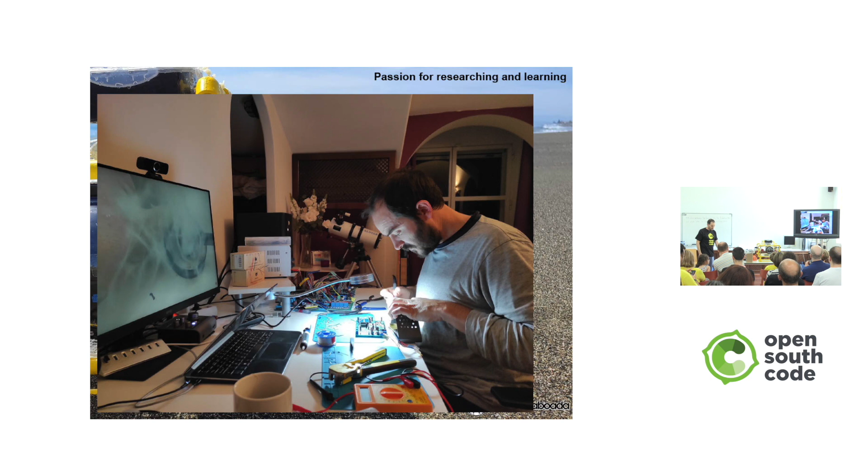Also, you have to have passion for sharing. In 2003, I was part of Malaga Wireless. We've been here in La Térmica, at Sala Benalmádena, since the year 2003. You have to have that—you have to share. You're in a community, you're getting something, and you must give something back.

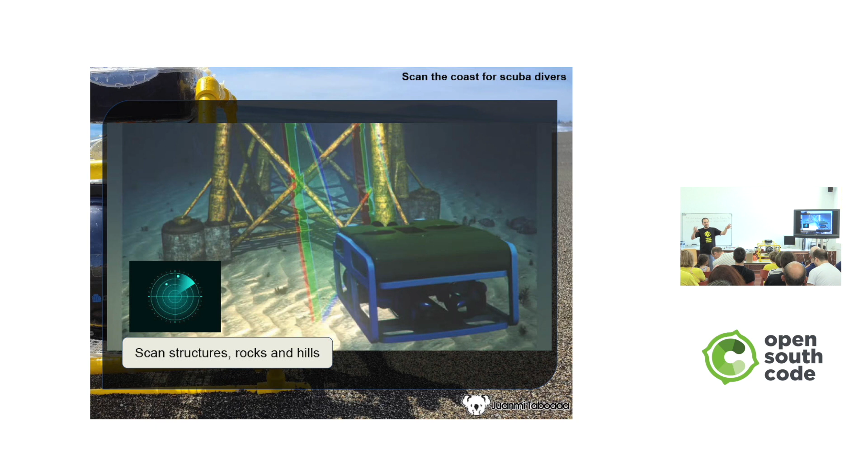So what is the basic plan? I want to make a 3D map of the place I want to go. What you can do is scan structures, save them in a database for later analysis, and slowly build a 3D map. You can also do it with sonars, which actually need a lot of energy.

For this kind of submarine, I decided to make it in a way that is low energy, that uses very little power. So it's built entirely with microcontrollers. There's no Linux, it's just a compiled microcontroller, an ESP32 and a Raspberry Pi Pico, which is a microcontroller, not a computer like we're used to, without an operating system.

One approach I decided to use was fish finders. Fish finders work really nice, they're cheap, but you have to modify them somehow to grab the information. The information they get from the ground and from the fish, you have to tweak it, change it, make it work for this purpose. So it was a difficult approach.

Then I found Meshroom. Meshroom is an open source software for photograph analysis, and it does exactly photogrammetry. Photogrammetry is when you take many photos of one object, and you can build a 3D structure from it.

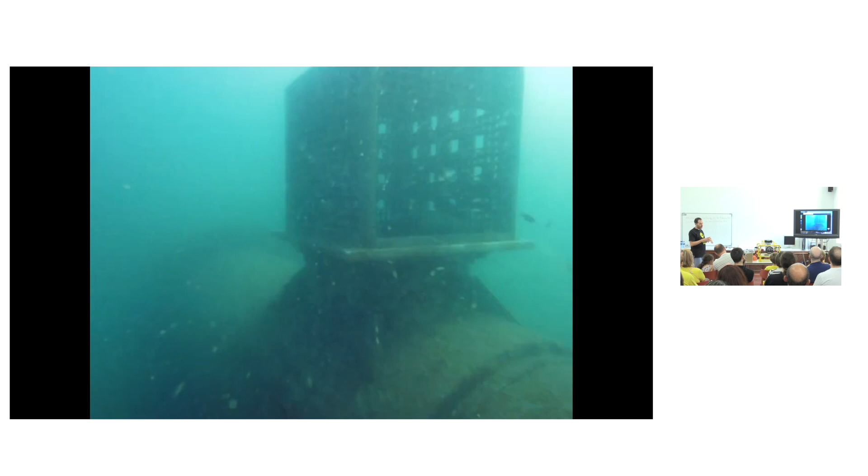So you are seeing something that is under the water. Actually, this is the entry to a different place that was requested.

In the next one, you will see the 3D reproduction of it. That's actually Blender, not Meshroom.

You can take the 3D shape in Meshroom, and you apply the textures in Blender. So that will be it.

This is another different one which I made the reconstruction of. I brought it to Blender, and I remade it a little bit, so the final client could imagine what's going on under the water, not only because of the video, but also because of the dimensions, so he could rotate it and get an idea of it.

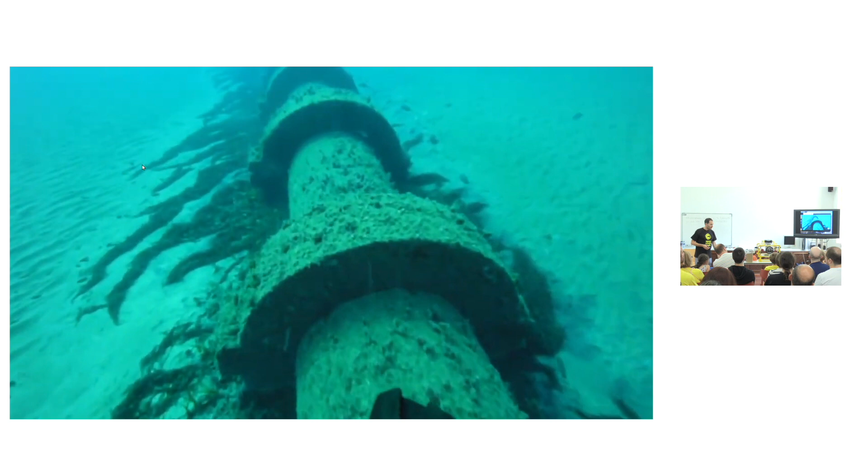And this is the 3D reconstruction of it. That's after Blender, using a mix of results from Meshroom together to fix it all together.

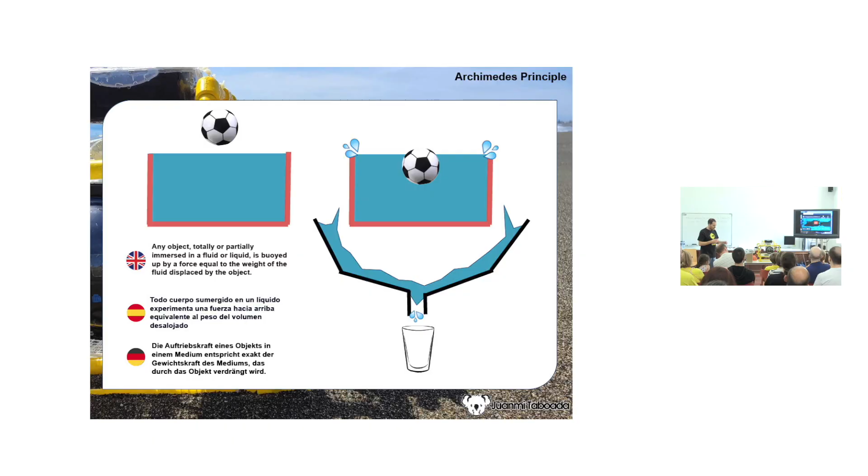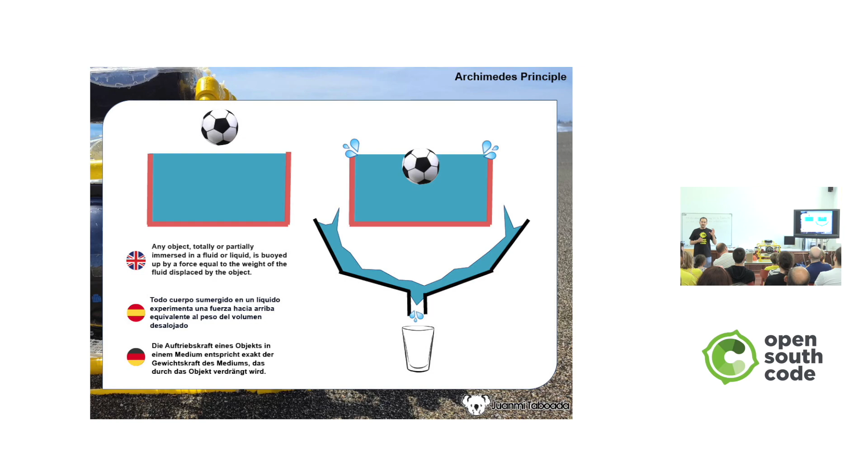Okay, a little bit of theory. Everything you do with this stuff, you have to know a little bit of how water works. So there's the first law, the law of Archimedes. We're going to talk about two laws. Archimedes' law says that any object that goes into the water displaces the volume of that object out of that place.

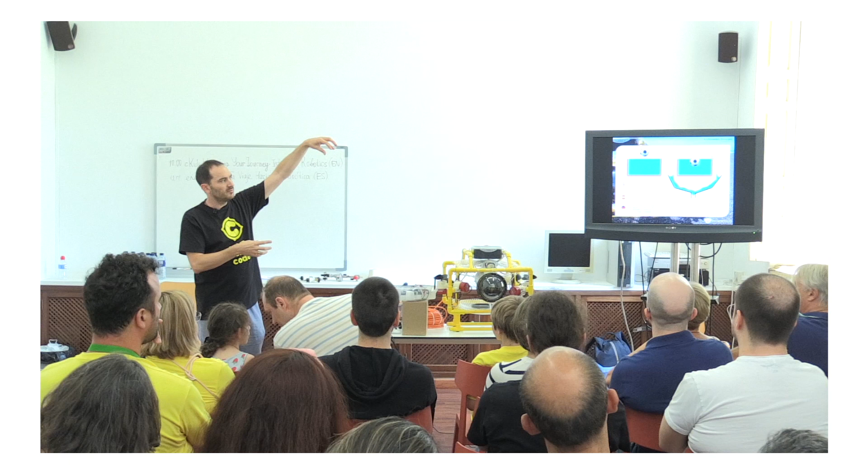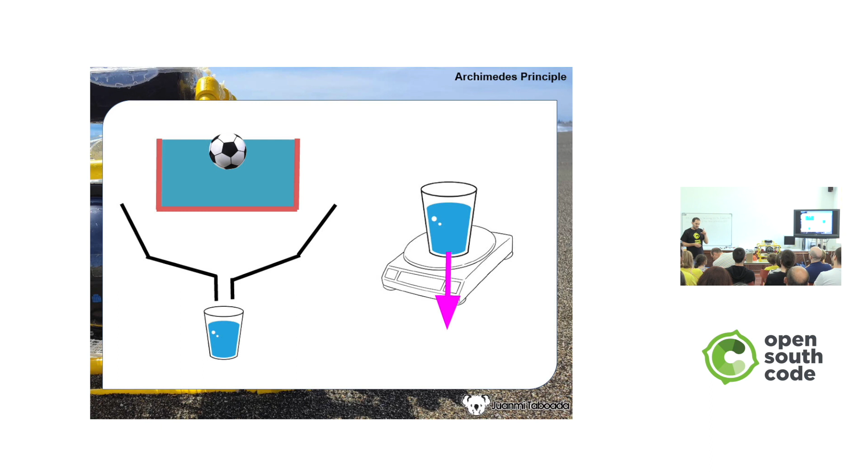So if we take all that water, when we put a football ball inside the water, it displaces some water and it goes out. Let's imagine we take it to a glass, we can measure its weight, we know how much it weighs. So the law says that the weight of that water is the force that is pushing the object out of the water.

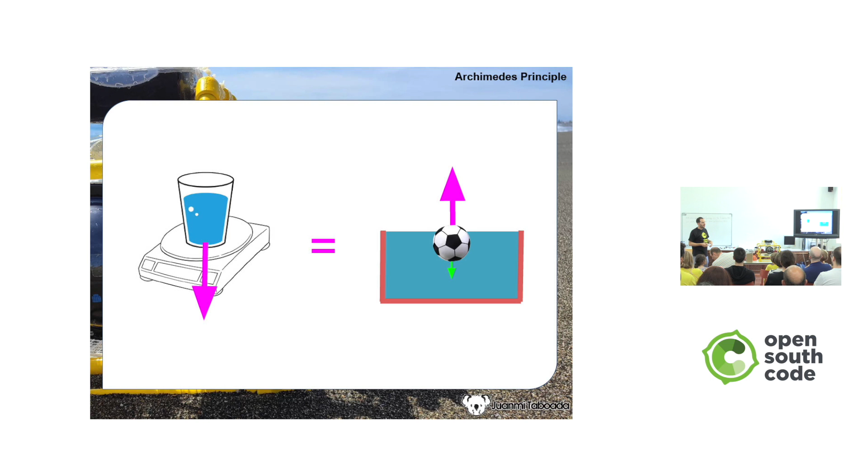So what can happen? If the ball displaces that quantity of water and it's 1 kilo, but the ball doesn't weigh 1 kilo, it will float. But if we make an iron ball, it will sink because it will be heavier than the water it's displacing, that it's pushing out.

There's another law, Boyle-Mariotte's law, which says that at constant temperature, the volume of a gas mass is inversely proportional to its pressure. What does that mean? Let's see it.

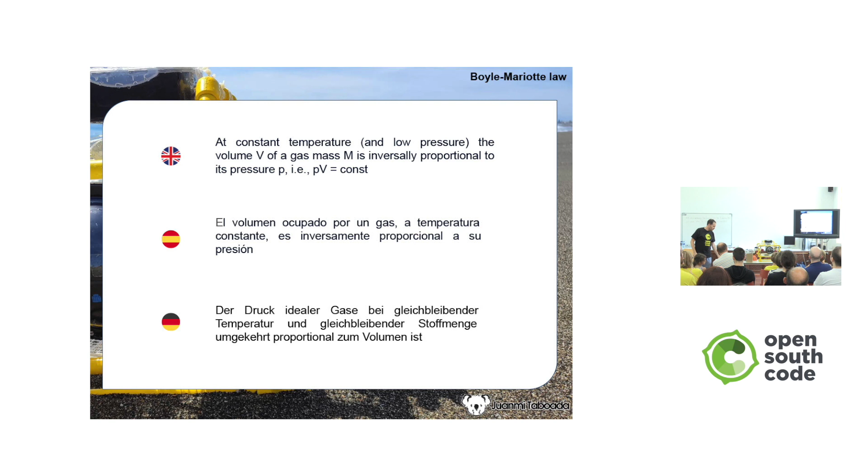Imagine we have this gas represented by 5 green points. When we compress it, we reduce the volume and increase the pressure. If we do it again, it will increase the pressure again and divide the volume again.

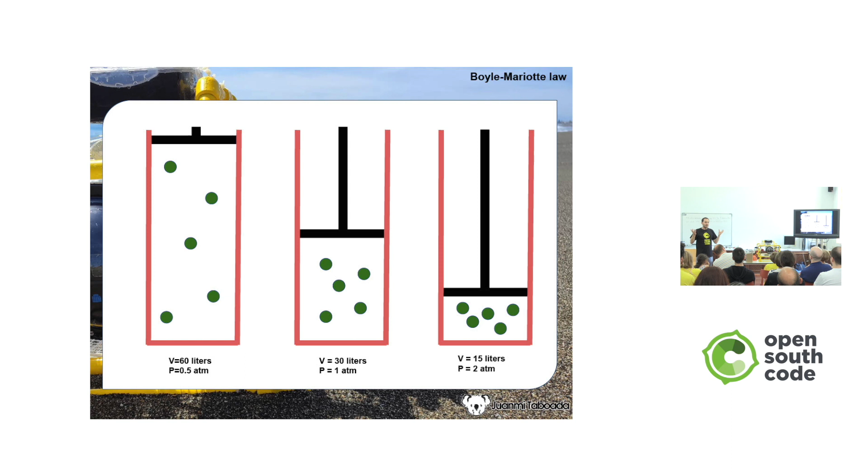So this is happening naturally under the water. At the surface you're at zero pressure, and as you go deeper, the pressure keeps increasing. So when pressure increases, what happens to the volume? It reduces. And combined with Archimedes' law, if you reduce the volume, you displace less water. So it won't be so easy to come back up, because the volume of your object has reduced.

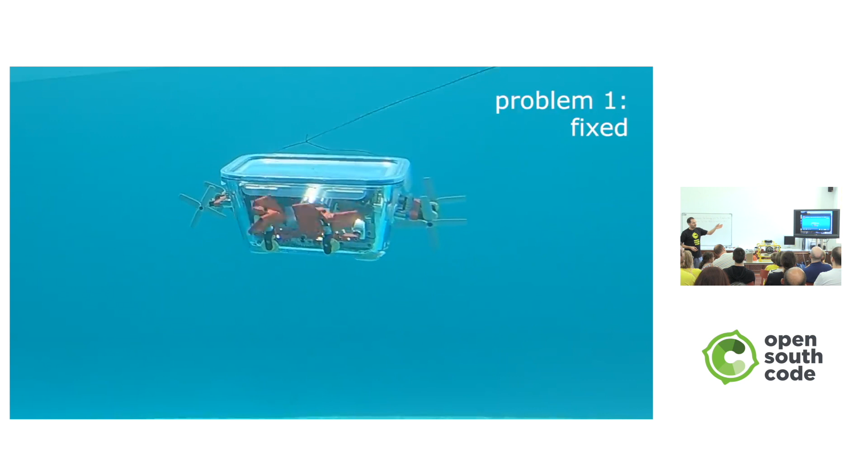So this is what happens with this kind of robot, because somebody could say, okay, I've seen the Lego one, yes it's easy to build, but after some depth it can't come back because of the weight. As you see, its shape changes, its volume changes, and it doesn't float anymore, so the engines can't take it back.

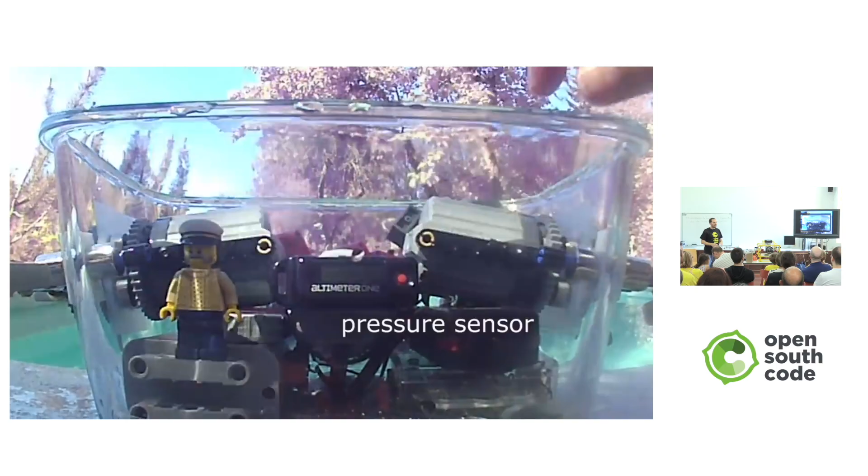This is one approach. This is another one which actually works very nicely, but when you see the videos, it's working in rivers at maybe 1-2 meters of water. This one works with a syringe, the kind used for injections. So the same thing happens: it works by taking water inside a cap, pulling it in and pushing it out.

But what happens when you're very deep? The pressure is very high, so you need a bigger engine, a bigger pump to push it out. That means more energy, that means needing more strength.

Just for you to know, with Boyle's law, in the first 10 meters when you get under the water, you reduce the volume in half. So most of the life happens in the first 20 meters. You have to count with that, you cannot forget about that at any time.

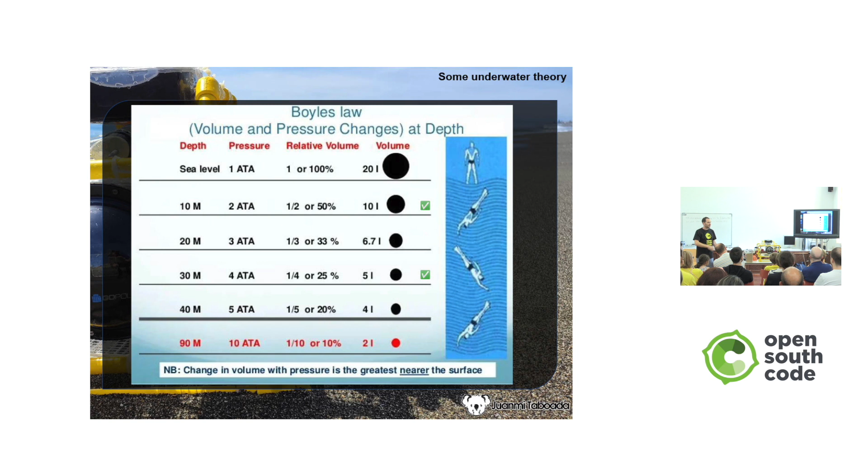Okay, we're all set with theory. What is the submarine about? My idea was that most of the ROVs I have seen work with a cable, and they are connected to the ship. So when you're operating the ROV, the information goes through a cable, and you need to be there.

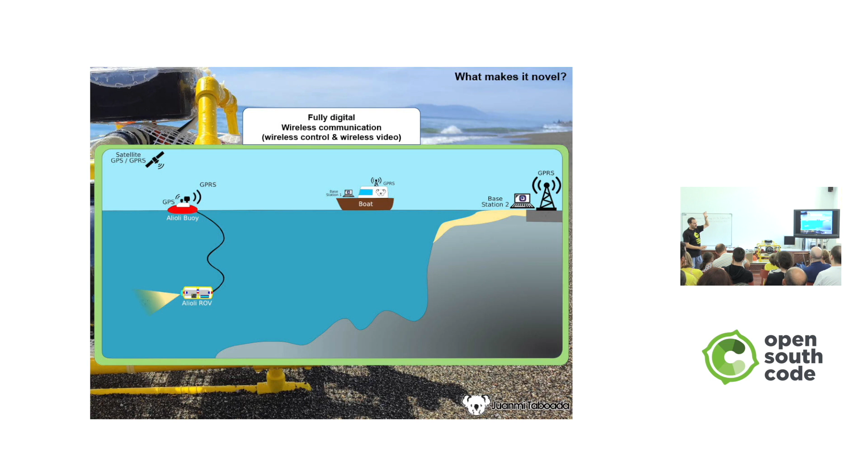My idea was a little bit different. I decided to make this one, what I call a buoy, that stays on top of the waterline. It communicates the surface with the submarine, so the submarine can operate, and the buoy can retransmit all the information to somewhere else, like a ship or the coast.

What happened with this project? I decided it's to analyze the coast, so it will be connected with coverage. It uses the cellular network to send information. When it starts, it connects to a server, sends information about where it's located on the internet, and opens a port that allows some software to connect to it. Through this antenna, it's retransmitting the video.

How is it doing it? It's using the circuit from a drone. Everybody has seen a drone flying, so the circuit of a drone is what's behind this antenna. The only thing I needed to do especially for it to work was to cool it, because if the drone is in the air, the air flowing keeps it cool, but on the water's surface, it just gets hot.

So I decided to make a circulation system that gets cold water from the sea, runs it through the system that's getting hot, and puts it back already warmed into the water. And this is the way that it works.

So what I was looking for was something I could share with people - the maps, the circuits - so they can build it themselves. Something open source, including the software. Something low cost, so everybody can build it. I have used only Amazon and AliExpress to get this, so it's within your reach.

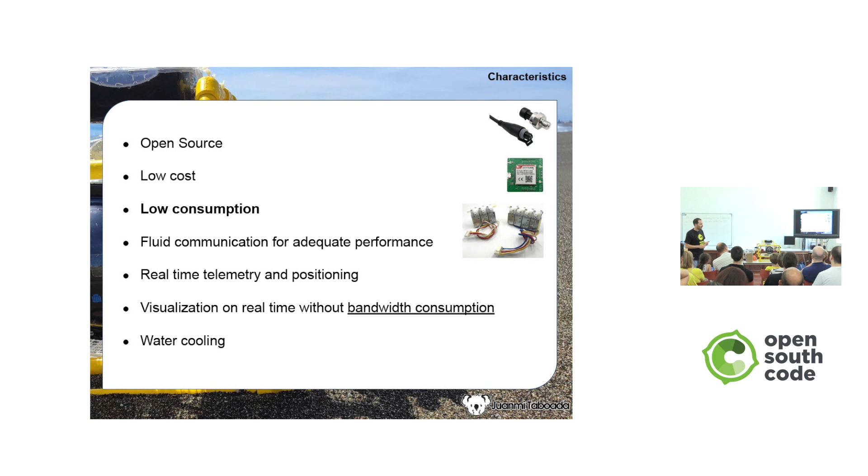Come on, I'm a computer engineer, so I'm getting this information, and I have so much information from this system, so why not save it? I'm getting this information and saving it in the database, so I can also know how the ROV is performing in real time and have a history of it.

Information about temperature of the water, depending where it is, I can move it around and I'll know the temperature, I'll know the pressure. I especially needed to know the depth. I have it here, but there's also a water analysis board that I worked on, which is supposed to make analysis of the water in different layers of the sea and so on.

So what you see is another software that I learned in all this story - Ground Control. It's also free software you can use, and it uses a protocol named MAVLink. That was one of my biggest problems to get this project finished, because I didn't know anything about MAVLink. It's a new protocol, and there were two versions, and I didn't know which one to use, and you had to learn it.

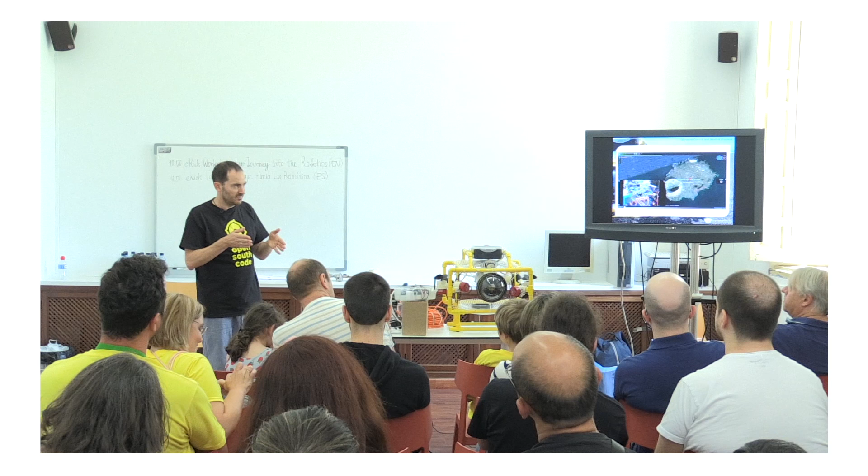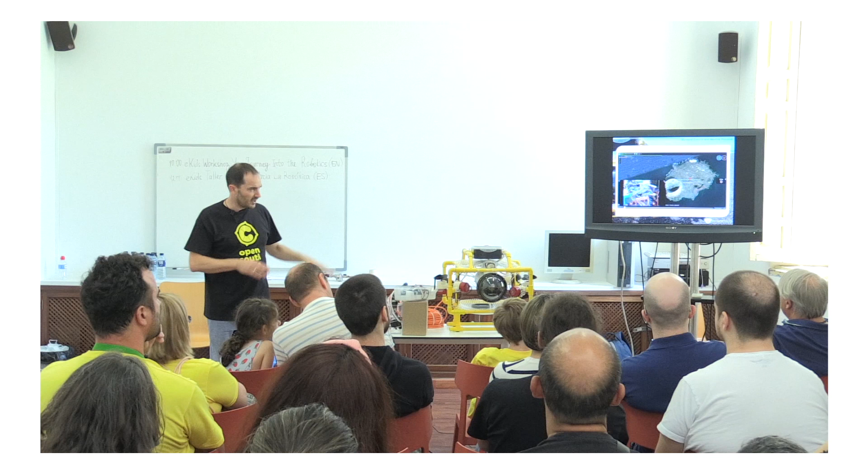Actually, this way of working pushes you to work byte after byte. The communication protocol is like RS-485, so everything coming in can fail, the transport can fail. You have to process each byte one after another and find out when you have the full package. So that was MAVLink, and together with MAVLink I got Ground Control. Ground Control, by sending the right packages, lets me say where the ROV is, what its telemetry and position are, and everything.

Something else - those are the Skydroid. Skydroid is another hardware which helped me a lot.

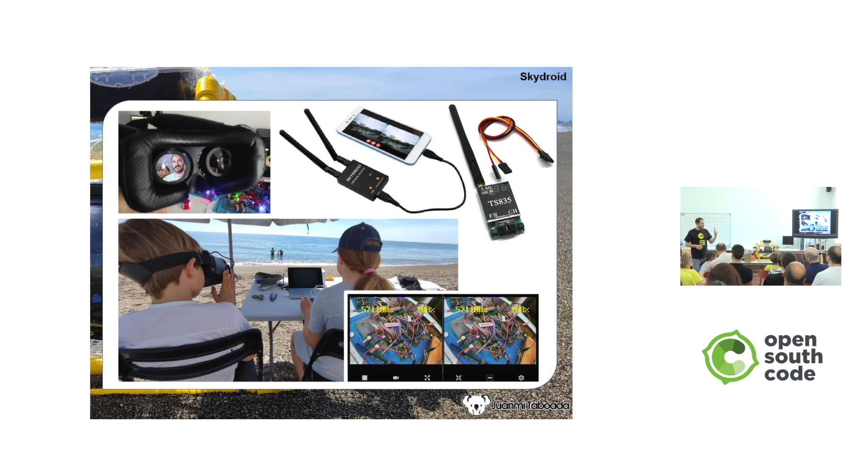Skydroid is a hardware used for drones, so you can convert the signal coming from the drone's antenna to USB. You can plug it to the phone, like I did in my goggles, or plug it to the computer like this one. This is plugged in, and it's bringing the signal here. So Skydroid is giving me that.

What else? Micro mini OSD. This is a little board that gives the OSD. If there is firmware, you set it up on your computer, set some parameters, and you have to communicate with it using TTL communication, sending the right packages. With the OSD board you are managing, you can manage all the telemetry information.

Everything you see on the screen is being sent by the ROV itself. All the image is being built under the water in real time. So in this way, through the one video channel I'm getting, I can see everything that is going on. Even if the cellular network is failing, I will know what is going on. Maybe I'm not able to control it, but I will know how to manage it.

Of course you see the final project, but there are mistakes as well. This was a system I wanted to make based on buoyancy. You put air in, and if you have compressed air, you can uncompress it when you're under the water. I thought it was maybe a nice idea.

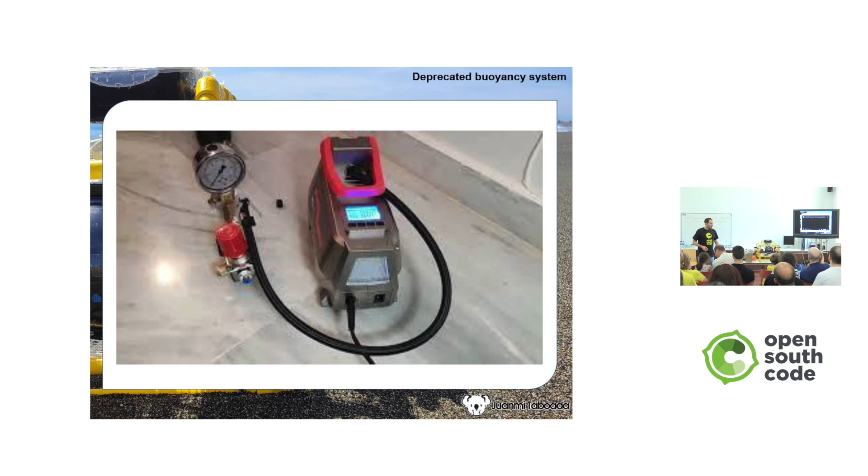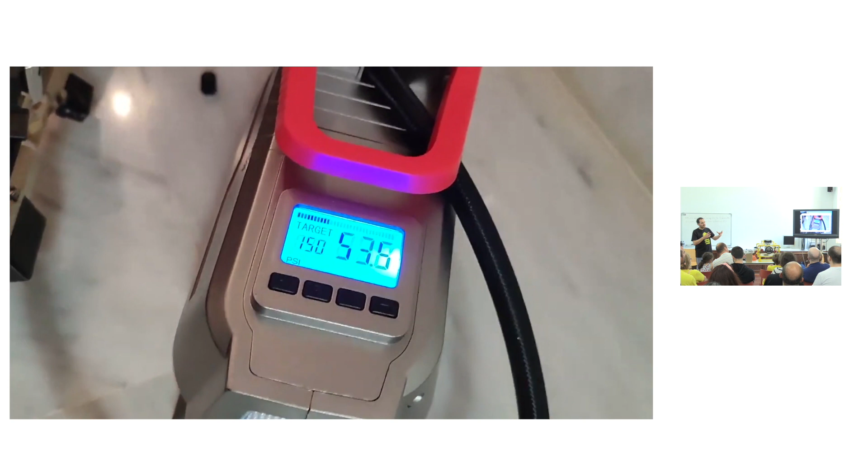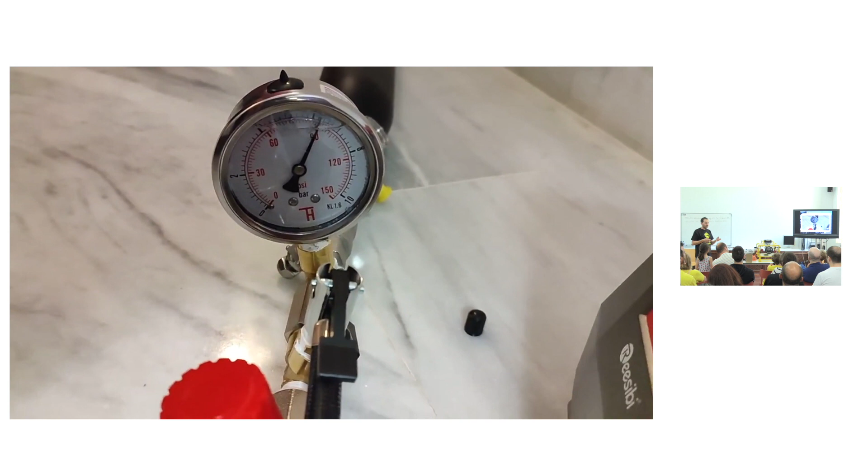So when I did it, this is it filling the bottle. I was looking for enough air so I am able to manage the ROV. What happened is that this is an inflating system for a car wheel, and it works, but the bottle is from paintball bottles. It doesn't get enough pressure to release more than 1, maybe 2 liters of air, and that's nothing under the water - almost nothing.

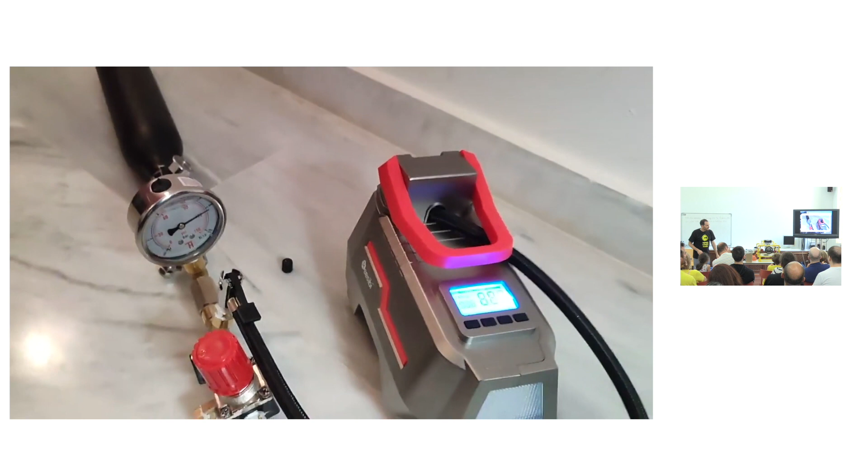More things - what didn't work out in the first place? My own browser. Until I met Cockpit control, I was building my own one. So that's time spent thinking, planning, doing and programming that didn't go anywhere.

The automatic buoyancy system didn't work. There was not enough pressure with the basic materials. I could take it to the scuba diving center, but that's not the purpose. The purpose was to make it with stuff that you can buy at home.

Also, I have problems with mass distribution and volume distribution because the Archimedes principle is slow. The buoyancy, in this shape, the cap is closed and there is air inside, so this is already displacing some water, and it's not going to change. So the first time I put it in the water, it was upside down, for example. That's things you have to work out.

Insulation was another problem the first time. The second time, actually, a little water went inside - things that you have to work out.

There is the umbilical, the cable - you have to find how to manage it. The system is already in the water and it's diving somewhere, so you have to manage the umbilical itself. When we're on the ship, we do it by hand, rolling it in and out. But this system is alone in the sea, so you have to manage it.

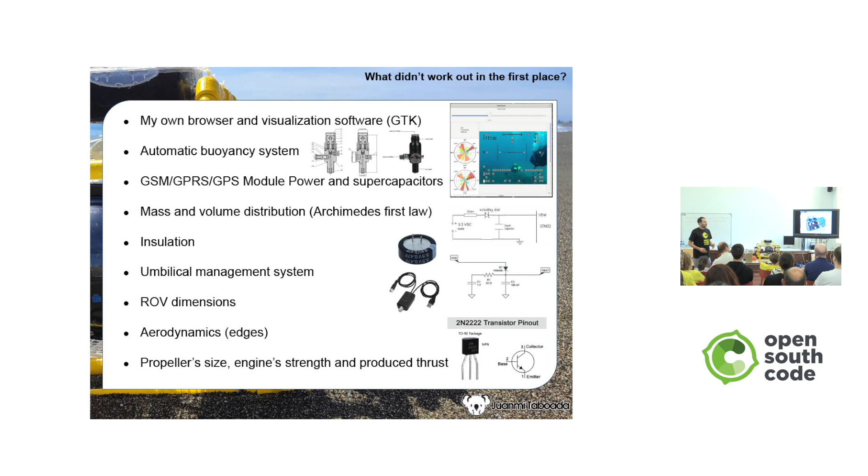What else? Command and Conquer. Command and Conquer is a game, but it's actually about divide and conquer. The approach I decided to do is I get all the information. The buoy is processing the MAVLink because the Raspberry Pi Pico is faster and has more memory, and the ROV inside has an Arduino.

For MAVLink, the whole control is using MAVLink, and the best approach is to divide. You can send packages in MAVLink to a buoy, for example, and split it, using the buoy as a gateway. So you can send different packages in MAVLink to the bus, and each part of the ROV should process it, not only one central unit. That will reduce my memory use and increase my speed. So that was one thing.

The water analysis board is something I had to work on to check it out, because it's already built, you can see it. And we are working with another friend on this.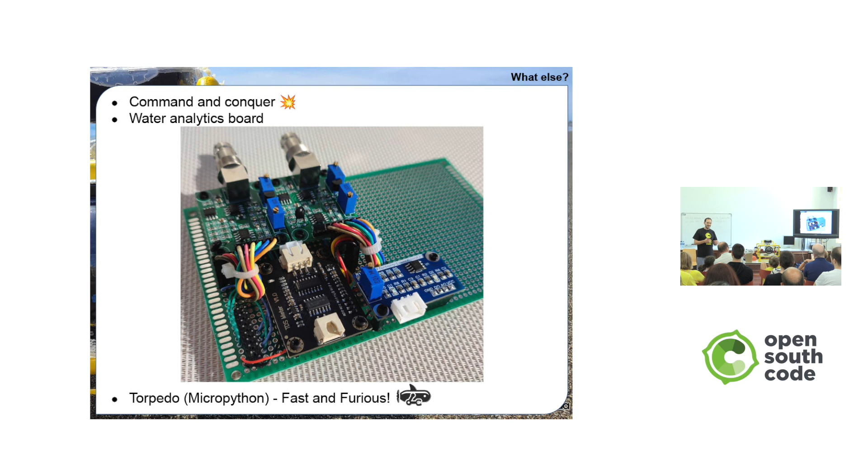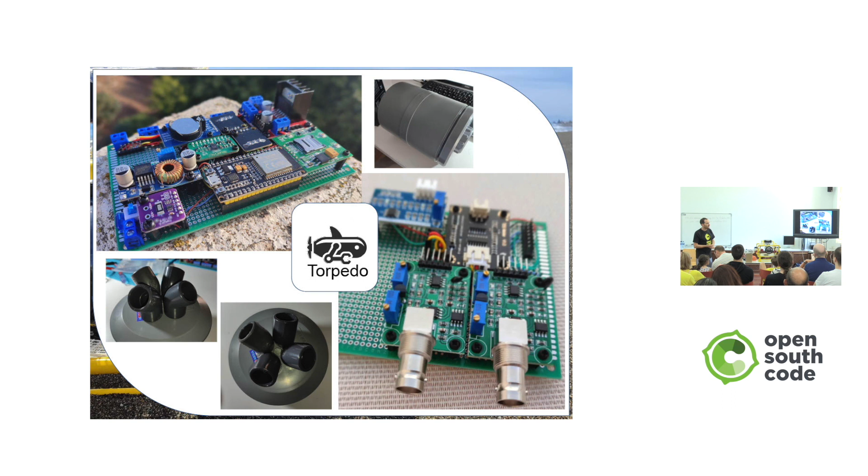We are working on Torpedo. Torpedo uses MicroPython, it's a different approach, and we call it fast and furious. It's something we wanted to make go faster and cover bigger areas. So it's not using propellers, but pumps. It gets the water and, the idea, since it's not finished, is to use water propulsion. We had to learn, try, and prove it out. This is it, and the idea is to analyze big areas of water.

Other uses. There are more uses. I wanted to scan only the coast, but you can use it for underwater photography. If you just change the microcontroller for something stronger, you can do image analysis, maybe follow divers and take photos of them.

You can use it with a bigger program, for body search, automatic body search. It can be used to study species invasions, which happens mostly with algae.

Archaeology: you can just send it and look, without having to take a scuba diver along the whole coast, which is actually pretty big. Disabled people can dive too, and I'm talking about fully disabled people, because I dive with disabled people and they perform better than us.

Game simulations, you can use it for racing underwater, if you have small, fast submarines, enough of them, you can make that happen. And this is a way of making cheap bathymetry, which is finding the depth at each level, so you can have a map of the depth of the sea.

Conclusions. I had to learn electronics and microcontrollers. The most important thing is that, yes, I can do it, and if I can do it, you can do it too. The GSM module taught me that. Never abandon, because somehow you will find a way. So just keep going, keep researching. I know how to make a sonar, and I haven't gone for it yet, but it's crazy.